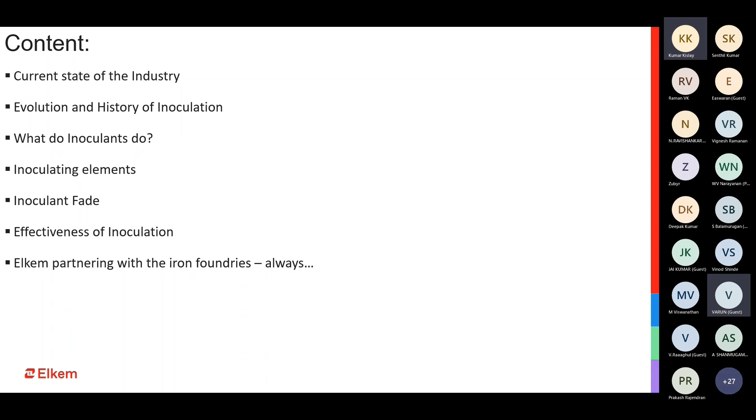To start with, we'll be talking about history and evolution, and I'm sure we have many senior foundrymen in the audience today who have seen the growth and development of the foundry industry over the last few years.

I would like to emphasize a few points. For example, we have seen casting buyers having much increased demand for mechanical properties like the strength of the casting, the elongation, the ductility especially for SG iron, the low temperature impact properties in such applications, the impact strength of the casting, surface finish, machinability, and the finish after machining.

We are also seeing unique grades coming into the market. Ten or fifteen years back we had a much more limited number of gray iron and ductile iron grades. But we have seen a lot of development in the last decade or so, with solution-strengthened ferritic grades, silicon moly grades, compacted graphite, CG, CMO, and many other grades with improved strength as well as improved ductility.

So that has come into the picture, which is a challenge for us as foundrymen, in terms of control of chemical composition, control of metal treatment, and control of the entire foundry process to try and achieve the properties desired by our customers.

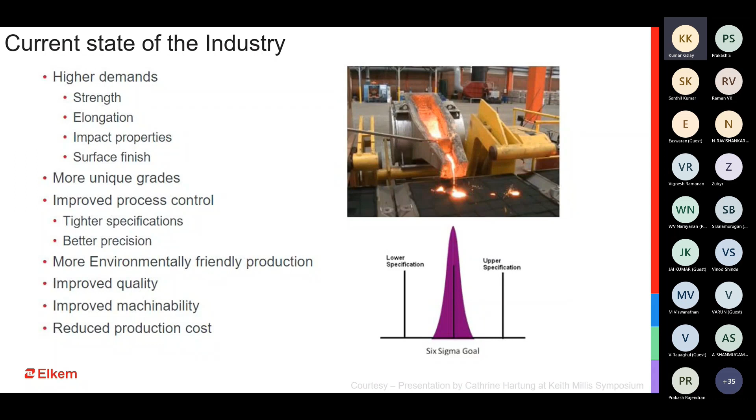So to start with, today the main topic is inoculation. We have been through COVID in the last 2.5 years, and we have all been vaccinated, I hope. Now is the time for the booster doses.

So what does inoculation actually mean? If you go by the literal meaning of the word inoculation, it is basically vaccination - an injection, a shot, an external foreign particle which gets introduced into your system, into the liquid metal, to improve the quality, properties, or entire behavior of the metal. That is what the inoculant does - a foreign particle introduced into the system.

So we can correlate it with whatever we want. It can be called a vaccine, a booster dose, or something which helps improve. It's quite similar to what we do when we get vaccinated - it helps our body become better or more effective towards external forces or deleterious factors. So that's what the inoculant does to a metal or a casting eventually.

So now a short trip down the history of inoculation. It's not new - in the early 1900s, that's about 110-120 years before today, casting was there, the metal was there, molds were there, and solidification was happening. It's not that if you don't have an inoculant, you don't get a casting - you still get them, but of course it will not be the same in terms of quality.

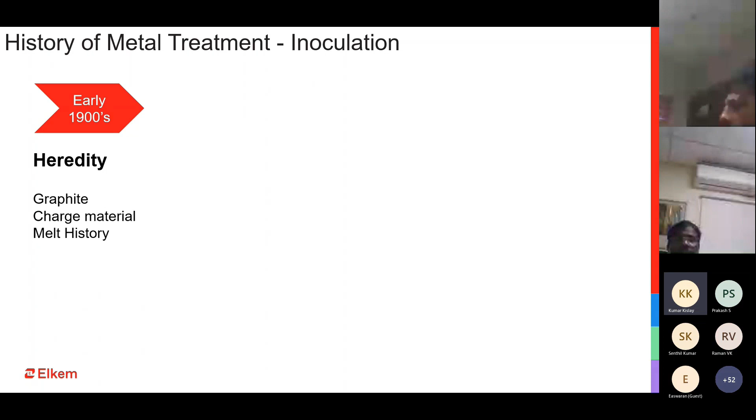So graphite, the charge material, use of pig iron, use of charged metals which are rich in nucleating potential, and of course the history of the melt - the heat, the temperature, the time, etc. That was the core essence of inoculation as a concept back in the 1900s.

Things changed a bit in the 1920s, probably coinciding with the First World War, when the industry wanted metal casting pieces to be more efficient, stronger, better in soundness. That is when deoxidation as a concept was brought into the cast iron industry, and the major elements used as deoxidizers were aluminum, titanium, zirconium, and vanadium.

These were the main elements, and some of them are still used today. It has been 100 years since we discovered the use of these elements for inoculation, and some of it is still there in the inoculating concept today.

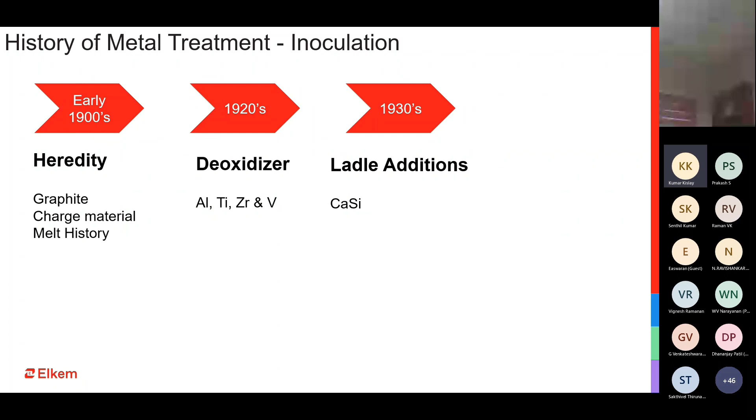About 10-15 years later, in the 1930s, we had calcium silicide as the additive into the ladle. The concept of adding something to the ladle as a post treatment, not in the furnace, was done for the first time around 1930s. The first material used as a ladle addition, with the aim to modify or improve the quality of the metal, was calcium silicide.

So after 1930s, once the concept of treating liquid metal with additives after the furnace came into the picture, there was a series of inventions which brought about many of the inoculating elements - some of it, in fact most of it, we see even today.

1940s was the beginning, especially in 1942 to be precise - we saw the first zirconium and manganese based inoculant come into the picture. I believe some of the members today in the audience have been using SMZ inoculant, a silicon manganese zirconium inoculant from Elkem, or maybe a similar composition from a different supplier. Zirconium manganese is a very common inoculant even today - that was the first proper silicon based inoculant, which had come into the picture in 1942.

Barium calcium came much later - contrary to the common understanding that it must be the first and most original inoculant. But no, it came around 1956. And 10 years later, we had the strontium inoculant, the Superseed or any other strontium inoculant that we have for gray iron today.

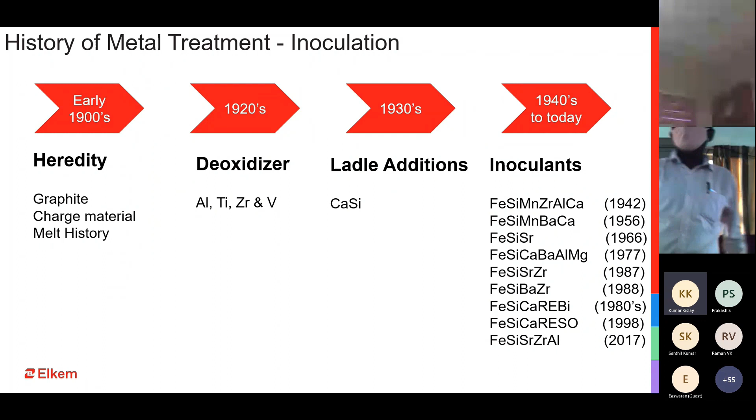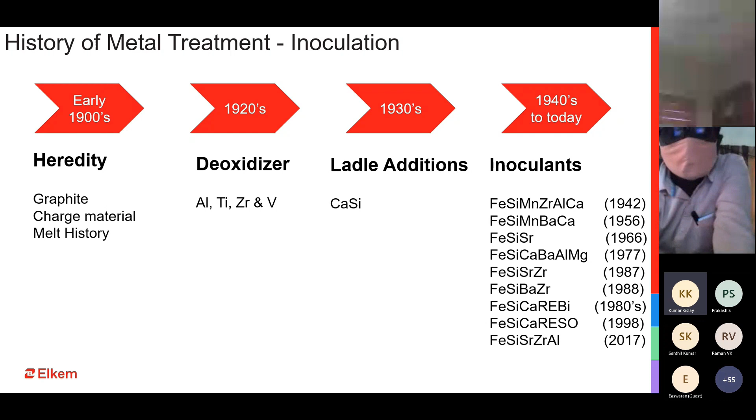There was a short period of time when magnesium was also introduced into the system as an inoculant. The role of magnesium was quite contrary to that of calcium barium. To give a brief history, when magnesium was introduced as an inoculant, it was not added to give a graphitization effect — it was actually added to control the graphitization effect. A team of scientists working in one foundry in Italy was working on controlling the microstructure, and that is where magnesium was introduced on purpose to see if it could control the growth of graphite, because magnesium is a carbide promoter. Magnesium negatively affects graphitization, so a small addition of magnesium was added to the inoculant to have better control on the graphite structure.

A combination of strontium and zirconium came in '87, a combination of barium and zirconium in '88, and then sometime in the 1980s itself, rare earths were introduced as inoculating elements. Rare earths with bismuth came much later, not for a long period of time. Bismuth could never gain the popularity as an inoculant, but yes, it did come into existence sometime in the 1980s, towards the end of the century.

1998-99 was the first origin of sulfur and oxygen coated inoculants. Until that time, inoculants were supposed to react with the sulfur and oxygen present in the base metal to give the inoculating effect. But then one of the scientists came up with the origin of sulfur and oxygen coated inoculants. Quite proud to say he was from Elkem — he was the person who invented this sulfur and oxygen coated rare earth based inoculant, which brought its own sulfur and its own oxygen into the system, thereby reducing the dependence on the nucleating potential of the base iron. This again became, and even today remains, one of the most potent inoculants for ductile iron.

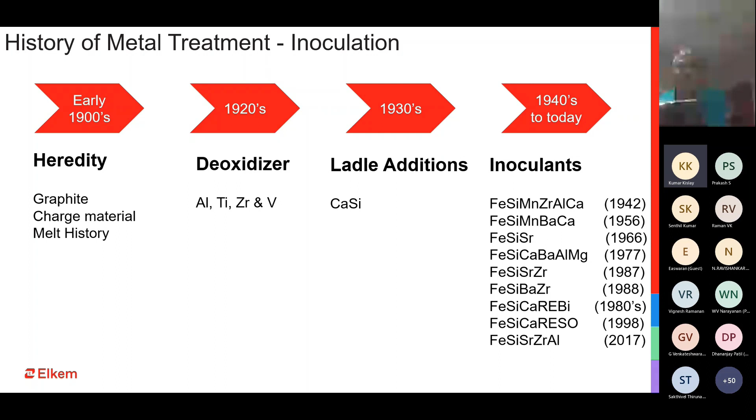Where we are today, I'll speak more about it in the later slides. But before I do that, let me give a short introduction on what an inoculant does. So what is an inoculant?

An inoculant is basically an external additive which is added to the metal, and the additions can be in the treatment ladle, the pouring ladle, or in the metal stream right into the mold — there can be different stages at which inoculant can be added. What does it do? It creates microparticles, small nucleating sites on which the graphite precipitates or growth happens. These microparticles can be sulfides, oxides, nitrides, even carbides in some cases, which act as a friendly site on which the growth would happen. So they act on the nucleation and growth of the graphite.

So what does the inoculant basically do? You have about 3.5% of carbon. About 2% of that carbon goes into solution as the solid solubility of carbon in iron, and the balance — 1.5% or 1.2%, whatever iron carbon is left — has to precipitate out as graphite. That is what we want as a foundry. If we do not make it precipitate as graphite, it would combine to form iron carbide. So what we want to do is introduce nucleating sites, favorable conditions where this carbon would precipitate out in the form of graphite.

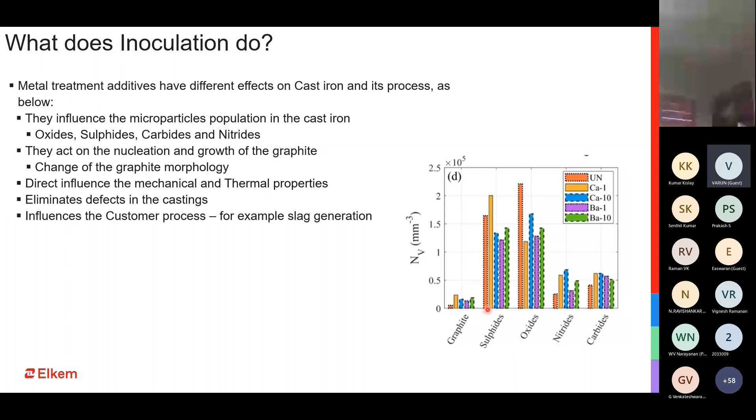How does it do that? How does the inoculant do all this? Basically, the inoculant is a ferrosilicon alloy with some additives. The additives are the inoculating elements, which I mentioned a few slides back, can be barium, calcium, strontium, zirconium, manganese, rare earths, bismuth, etc.

What do these elements do? The question can be, why only these elements and not the rest of the elements on the periodic table? These elements have a very strong affinity towards oxygen and sulfur. So they combine with the oxygen present in the system, they combine with the sulfur present in the system, and after combination, they create those inclusions, those small substrates on which the graphite would eventually precipitate.

Now, why is it only ferrosilicon based? That can be another question. Why can't we add pure strontium, pure barium, or pure calcium into the system? Why a silicon-based one? Why a ferrosilicon-based inoculant? This silicon which comes with your inoculant, which can be in the range of 50 to 75%,

this silicon coming in with your inoculant creates a small zone which is rich in silicon. I'm talking about very micro-level solidification here. There can be a very small particle, a very small site within your metal which will be very rich in silicon. Because it is rich in silicon, it gives constitutional undercooling, which allows carbon to precipitate out. It reduces the total percent of carbon that can be held by the iron, making sure the carbon which cannot be held back by the iron comes out or precipitates as graphite. So basically, this silicon reduces the solubility of carbon in your iron and makes sure the carbon comes out.

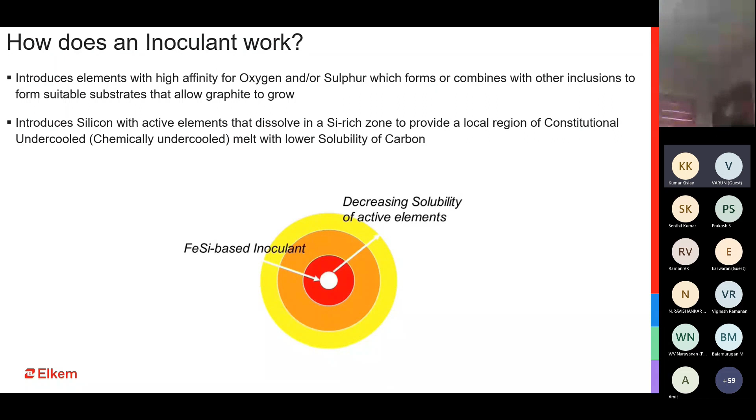So it's a combination of role between iron, silicon - basically Fe - and the inoculating element that we introduce along with this ferrosilicon as the carrier. So that is how the inoculant works. Each of these inoculating elements, like I'll speak about in the slides later, has a specific role to play, a specific characteristic, which would be the deciding factor for us as foundrymen on which inoculant to use for which particular casting and which particular condition.

So I told you about how the ferrosilicon and the inoculating element works. Like I mentioned, solidification would happen inside a casting, inside a mold. When you pour a liquid metal, solidification would happen even if we do not add inoculant. It's not that if you don't add an inoculant, solidification would not take place. Why? Because your metal will have some inherent nucleating potential, some inherent impurities which would act as the site for growth. So there will be solidification.

But then why to inoculate? Why do we want the inoculant to come into the picture? Why are we adding 0.1%, 0.2%, 0.3%, 0.4%, or whatever is the addition rate of inoculant into our metal? Very simply, it can be explained here. I would use the pointer.

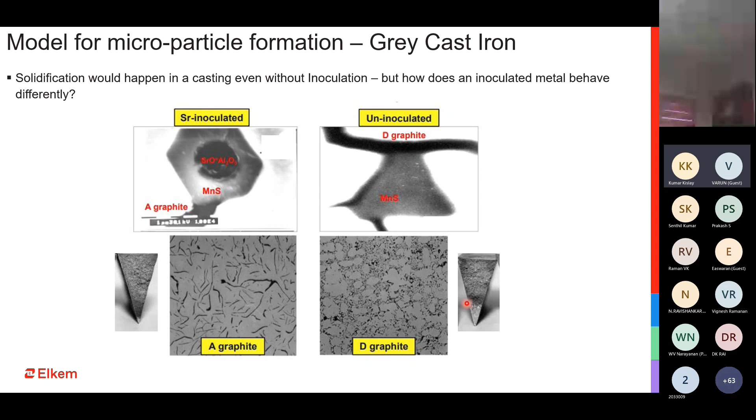Like I said, solidification would happen even without inoculation. But why does, or how does, an inoculant help? A good inoculant - and now I'm talking about ductile iron here, we spoke about gray iron before - in case of a ductile iron, a good inoculant will form a hexagon of oxides of inoculant and oxides of aluminum and silicon, which is present in your system. This will be around the core.

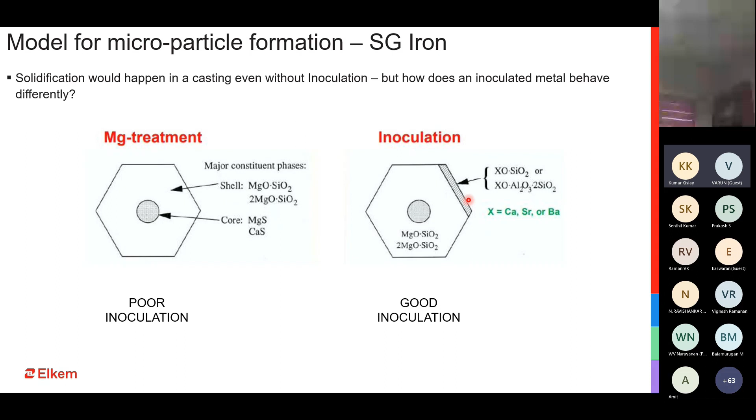Now the second question: why do you need it to be a hexagon? We are talking about magnesium. We have been speaking about the affinity of sulfur and oxygen, and how the inoculating elements, because of their affinity towards sulfur and oxygen, become an inoculant. So there should be a question: we all know magnesium also has a very strong affinity towards sulfur and oxygen. So why is it not an inoculant? Why do we not see magnesium acting as an inoculating element? And why do calcium, barium, strontium, etc. act as inoculating elements?

A basic explanation is that the silicates of magnesium are not hexagonal in shape. This is pure chemistry, taking you back to class 10th, 11th, 12th or so. Magnesium silicates are orthorhombic, while silicates of calcium, strontium, barium, and zirconium are hexagonal in shape.

So how does it affect graphitization? Graphite has a hexagonal crystal structure. So when graphite, which is a hexagon, combines with the silicates of calcium, strontium, barium, which are also hexagonal, it ensures that graphite can precipitate easily on this type of structure, but finds it very difficult to precipitate on an orthorhombic structure. That is why, despite having a strong affinity for sulfur and oxygen, magnesium is not an inoculating element, but calcium, strontium, and barium are.

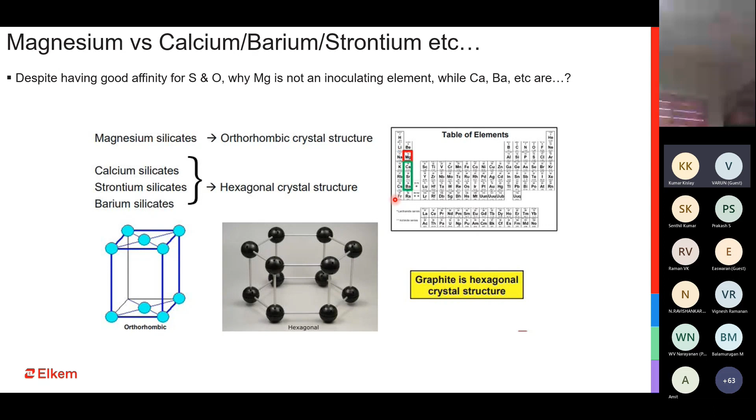How does the inoculant look? What is the inoculant? How does it look under the microscope? We only talk about graphite structures, the flakes and the nodules, but how does the inoculant actually appear? I showed you the schematics, but now we are seeing actual higher magnification images of the actual core and the actual graphite precipitating out.

So these are the microstructures, you can see it. This photograph was taken in 1993 by Torbjörn Skaland, and he still works for us. He's one of the Elkem stalwarts, if you want to call him. He was the guy who in 1993 tried to look under the transmission electron microscope and found the actual core of a graphite, the actual core of solidification.

And then we were also able to capture the different elements and how they look under the microscope, the different elements which promote or support graphitization in the casting. So this inoculation basically coats the microparticle, the core, which are naturally generated, reduces the undercooling, and thereby promotes nucleation or graphite precipitation.

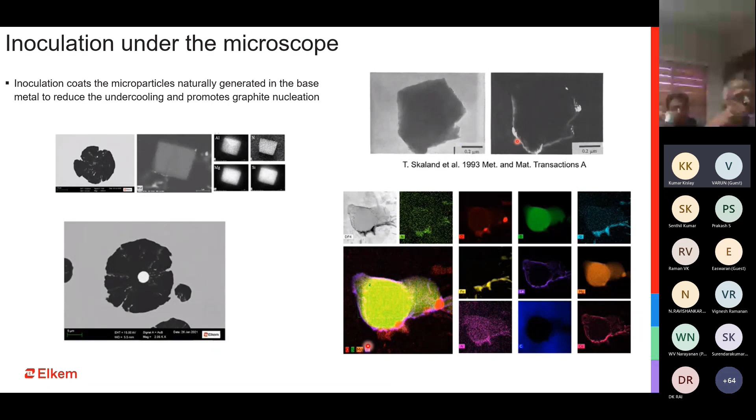I spoke about a few elements, maybe 2 or 3, but now we will look at the different elements and how to choose or select between inoculants. We have calcium inoculants, barium inoculants, strontium inoculants, aluminum inoculants, etc. Which to choose, when to choose, and why to choose.

Calcium is one of the most common and readily available inoculants in casting. Sometimes we get confused by considering ferrosilicon as the inoculant. Ferrosilicon is not an inoculant. It behaves as one only because it has some calcium in it. Any ferrosilicon bought from the market would have about 0.1 to 0.4-0.5% calcium, and this calcium is what makes ferrosilicon act as an inoculant. It is an essential element; most inoculants have calcium inherently in them, except maybe one or two.

It is a medium potent inoculant. It does not have very strong potency and has a much faster fading rate, so it fades pretty quickly. If you're using a calcium inoculant, you definitely have to add a lot more of it into the system.

Second is barium. In most cases it's used in combination with calcium. It's quite a universal inoculant, meaning it can be used for both gray iron and ductile iron, and also for compacted graphite iron. Barium has a much wider application range compared to some other inoculants, because the barium oxides formed have a much higher fading time, so a barium inoculant has very good fade resistance. For foundries with a longer pouring time or longer process time after addition of inoculant, barium is the way to go.

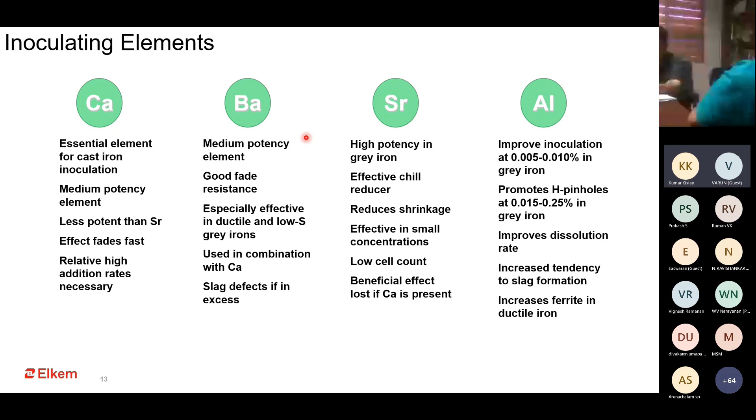There is a limitation to it. Strontium inoculant cannot work effectively if you have calcium present in the system, which is why most strontium producers do not add calcium to it. This is one of the main reasons strontium inoculants are not used in ductile irons, because ductile iron treated with ferrosilicon magnesium would have some calcium inherent in it. That's why strontium does not behave as it should in case of SG iron, so strontium inoculant is more commonly used for grey cast iron.

Aluminium inoculants are not very common on their own, but we do have aluminium present in almost all the inoculants available in the market. A small amount of aluminium improves graphitization - we saw the aluminium oxide forming the core in the slides before. It also improves the dissolution rate.

In fact, aluminium inoculant finds its maximum application in heavy section ferritic ductile iron castings because it has a very good tendency to promote ferrites. So most of the in-mold inoculation you'd see - the inserts and blocks added into heavy section castings, especially windmill castings - are in most cases aluminum-based inoculants.

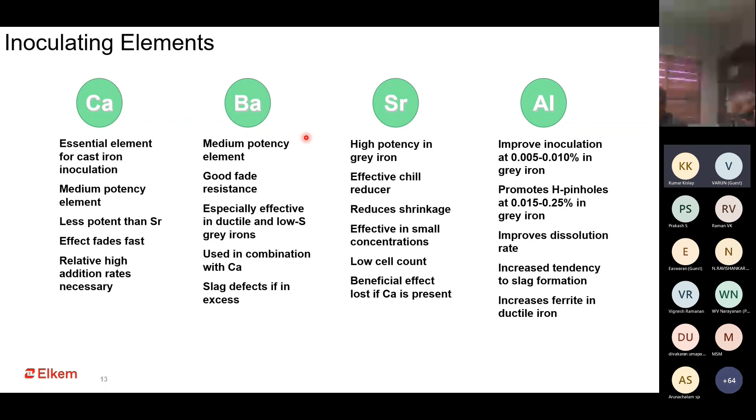The next one is zirconium. Zirconium-based inoculant, in combination with either strontium, barium, or calcium, and sometimes even independently, has a very balanced effect on casting solidification. It can find application in both gray and ductile iron castings. It refines the structure in a very good manner, especially for castings with heavy cores which can potentially have nitrogen fissure defects - zirconium inoculant finds use there because it controls the nitrogen fissure defect in castings.

In combination with strontium, zirconium inoculant also helps control the length of graphite flakes in case of gray iron, and also the coarsening of graphite flakes. So foundries having type C graphite problems, apart from controlling the carbon equivalent, can use a zirconium-strontium inoculant. Foundries producing gray iron castings with both heavy and thin sections may find a plain strontium inoculant not useful - there, a combination of zirconium and strontium gives a very good effect.

One of the latest or modern inoculants has been the rare earth based inoculants. Rare earth basically means primarily cerium and lanthanum. Rare earth element inoculants find application more into ductile iron castings. It helps improve the nodule count substantially in case of ductile iron, and has a very good tendency to control carbides and shrinkage in the casting.

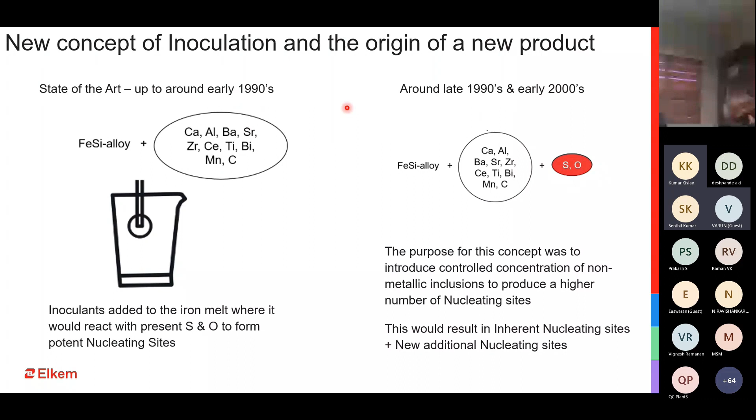So when ductile iron manufacturers do not add pig iron, they inherently reduce the nucleating potential, because even when pig iron was bringing the bad elements, it was also bringing in nucleation. The compromise was that we had to control the negative elements, and that is why we had to control the pig iron, but then we lost out on the nucleation. So how do you bring the nucleation back? One way is to precondition, but another way is to use an inoculant which brings its own nucleating potential, giving you additional nucleating sites along with the ones you already have. This was the concept because of which sulfur and oxygen coated inoculants came into the picture, and that was the origin of this flagship inoculant that we see in the market today.

Inoculation is the addition of a ferrosilicon based product, but we also add ferrosilicon in our system, more so to increase the silicon content. But that silicon which comes from your ferrosilicon addition stays in the system, whereas the effect of inoculation does not stay forever. So what do we call this phenomena? We call this phenomena fading.

The effect of any inoculant you add into the system is going to fade. It can have a different time, a different effectiveness, a different end effect, but the inoculant will always fade. The fading of inoculation starts right after the addition of the inoculant. There is a very small degree of fading which happens when you add the inoculant, but over time, the rate of fading increases substantially.

There are definitely a few inoculants, like I mentioned, barium, which fades a bit slower than the other inoculants. And why does this fading happen? We'll see in the next slide. But what happens when your inoculant fades? You have an increased undercooling, poor graphitization, and a much higher tendency for carbides. You have a reduction in the number of eutectic cells, much lesser uniformity in the flake distribution in your gray iron, and a much lower count of nodules in your ductile iron. Because you have a much lesser nodule count, your nodularity will also get affected.

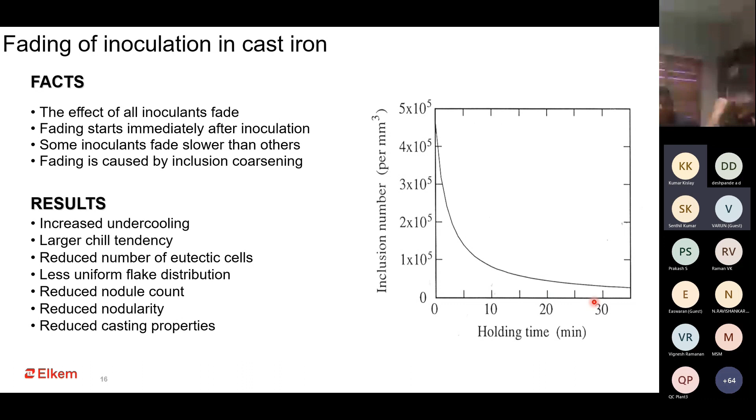Why does this happen? Why does the inoculant fade? When you add the inoculant, you actually create a lot of nucleating sites, a lot of locations on which the graphite would precipitate. But after time, these nucleating sites find it very difficult to hold on to their number, or hold on to their size and shape, because they are very micro in terms of size. So what do they do? They have an inherent tendency to try and combine with the next one. The two sites which are close to each other will try to combine to form a bigger site. And once it becomes bigger, it becomes more stable, more safe. And this tendency keeps happening with time.

This concept is called ripening. Ostwald was the scientist who found this, and based on his name, this effect is called the Ostwald ripening effect, where these small nucleating sites basically ripen. They become bigger, and eventually, as they keep becoming bigger, the number of nucleating sites keeps coming down. And as the nucleating sites keep coming down, the inoculant effect keeps coming down, and that is what we call fading of inoculant.

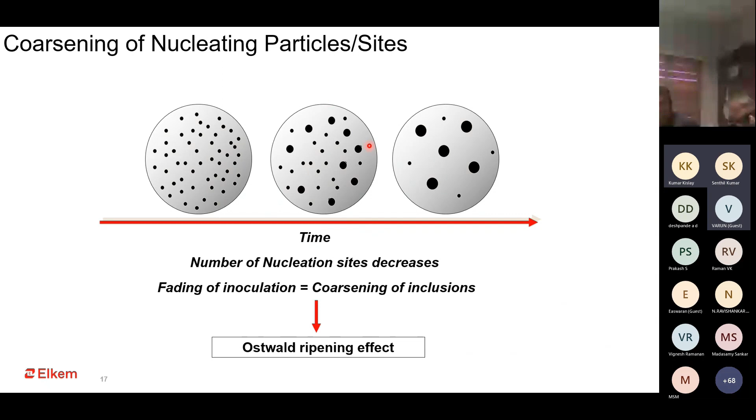What do we want to do? We want to make sure that our complete solidification and complete casting happen sometime here. Not the solidification, but at least the casting should happen somewhere around this time, so that you have sufficient amount of nucleating sites for the graphite precipitation.

But then how do you analyze if your inoculant is good? How do you analyze if your inoculant is working properly? You can look at the chemical composition. Yes and no. I mean, just having the silicon increment, you will not have an increase of any other element basically. Maybe about 60% of your inoculant addition will be silicon, so we'll have some increase in your silicon. But just having an increment in silicon does not assure or ensure that your inoculant is working. That is basically ensuring that your inoculant has been added.

A better way of doing it is to look at the microstructure. When you look at the microstructure, you'll have a much better graphite precipitation, a much better carbide control, and a much better uniformity in your structure. Even more potent and accurate is to look at the thermal parameters. You look at the thermal analysis, the lower eutectic temperatures, the solidus temperature, the graphite precipitation behavior, and the angle towards the end of solidification to see if you have enough graphite precipitation.

You look at the recalescence. These parameters give you a very direct indication on the effect of nucleation. Further, if you're able to achieve a good microstructure, a good thermal parameter, definitely the mechanical properties are the next things which will give you an indication that your metal has been properly inoculated.

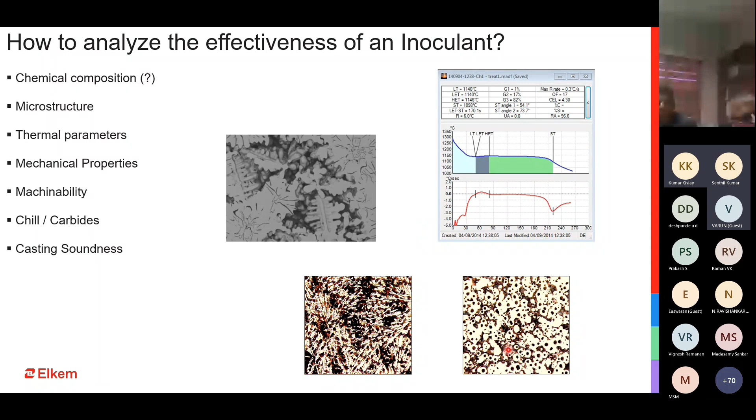So you ensure enough graphite, you ensure that you do not have this directional solidification, you ensure that you have enough graphite precipitation, which would compensate for the volumetric shrinkage, and thereby you get much better casting soundness and do not end up with something like this. Or something like this, where you see these carbides and where you see this not so good nodularity.

But does a good inoculation ensure that you get a very good casting? Or does it alone ensure that? Definitely it helps, but it is not just the metal treatment or the inoculant. This is more of a disclaimer from the inoculant manufacturer, that it is not just the inoculant which ensures that you get a very good casting.

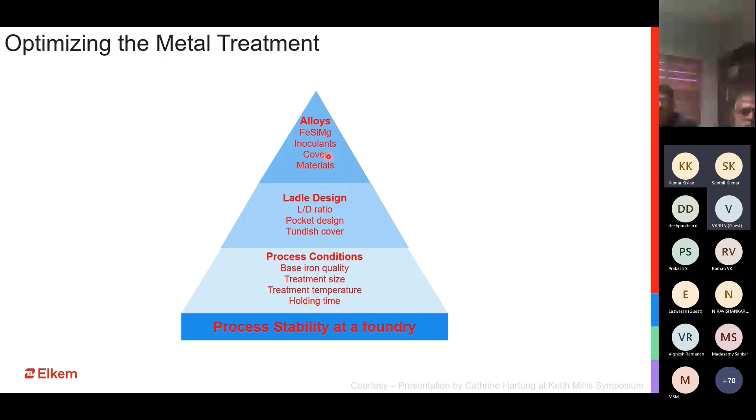It's more towards the process stability. It's more towards the process conditions like the base iron, the treatment size, the treatment temperatures, the holding time, the design of the ladle, and eventually the treatment alloys that make sure you get much better process stability, you get a much better casting.

And what do we have to do? We have to always make sure that we work from the bottom to the top. So unless we are taking care of these parameters, unless we are looking at these conditions, just relying upon and depending upon the treatment to take care of the issues that we have in the system will not always give you the best results possible. So we have to work in this direction. We have to make sure that the rest of the system is good, and then definitely inoculant is a friend which would help us produce good quality castings.

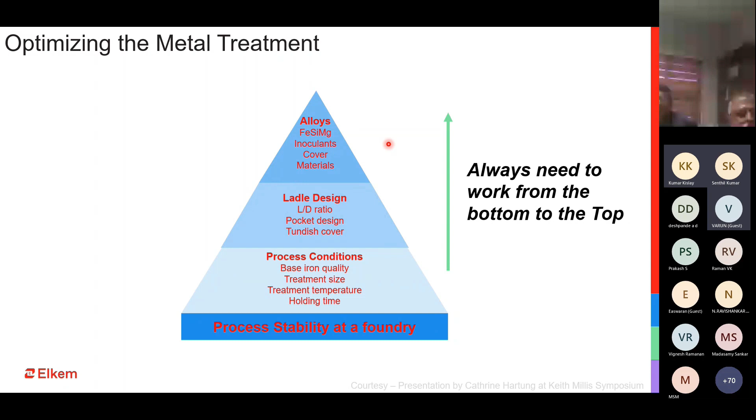Now I'll talk a bit about some of the new products, some of the new concepts, and how they help us get the best of our inoculation, and also help us improve and eventually achieve the best quality castings.

Preconditioners. We spoke about the furnace, the inherent base nucleating potential, the quality of the base iron, and we also spoke about the limitations and dynamics of raw materials that are there today, including the cost and impact of it.

So in some cases, we end up having a not-so-good base metal. It could be because of the raw materials, the process, the limitations a foundry has, or the heavy critical requirement of the casting. When the casting needs something extraordinary, the inoculant alone may not give you the desired effect.

In all these cases, we tend to introduce a preconditioner. A preconditioner is basically a furnace additive added in the range of maybe 0.1 or 0.2%. What does it do? It ensures that it improves the quality of the base iron, makes it consistent, improves the morphology of graphite, negates the impact of tramp elements or trace elements, reduces the tendency for carbides and shrinkage, improves mechanical properties, and reduces the need for pig iron.

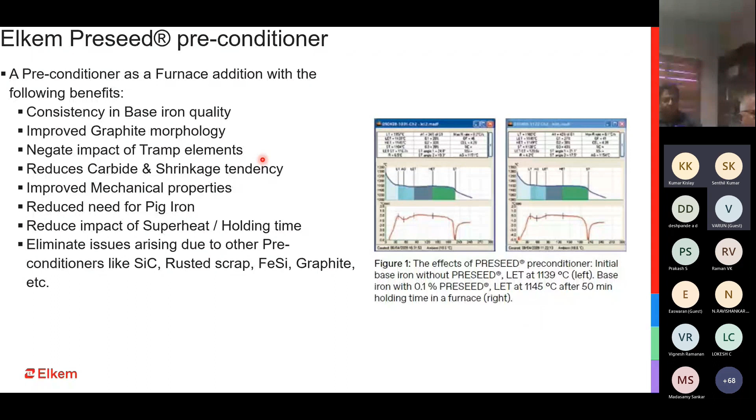That means we are not sure how effective it would be. There will also be a limitation on the graphite that you are adding. So all these negative elements or aspects can be controlled when you have a preconditioner, more like a Preseed.

Another way of doing it—I'm talking about additions to the inoculation—is by having a very good treatment cover. When producing ductile iron, we all know that we have punching scraps, or sometimes even turning borings or other such things which we add as a cover. The role of the cover in these cases is to delay the magnesium reaction.

What do we want to achieve? We want the magnesium reaction to happen when you have sufficient amount of metal in your ladle, so that you get better recovery of magnesium. But that is not always possible with the covering scraps, or with the turning and borings.

Why? Because these covering scraps and turning borings need a lot of heat for melting, and they may bring their own set of unknown elements into the system. It can be oil, rust, lead if the scrap is coated or painted, or zinc. There can be many more things which these covering scraps can bring with them. When you have such a covering scrap, your inoculation and even your ferrosilicon magnesium treatment will not be effective.

So what do you do in that case? You add a known cover, one for which you always know the chemical composition, and you add less of it. How does it help you? It improves the recovery of magnesium.

It conditions the slag, making sure you have dry slag so it does not go into the system, into the molds. It increases the nucleating potential, and definitely improves the stability of the process compared to unknown covering. It also reduces the power cost and the cycle time—though we can take that up as a separate discussion.

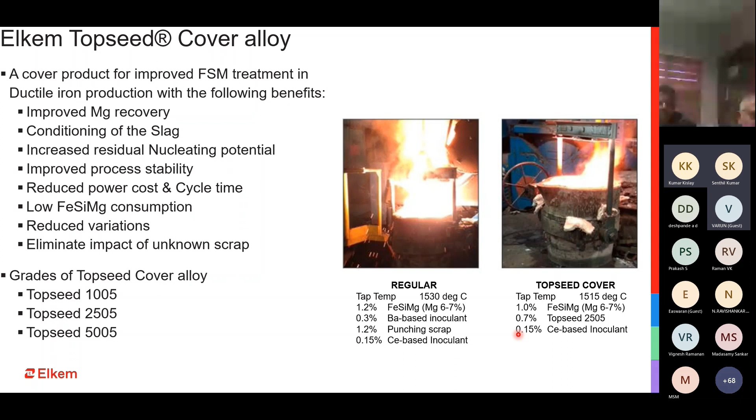It reduces the addition rate of ferrosilicon magnesium. It reduces the basicity variation in the system. And as I mentioned, it eliminates the impact of unknown scrap. There are case studies where we have seen the use of Topseed reducing the addition rate of ferrosilicon magnesium, reducing the requirement of inoculants, and also reducing the tapping temperature and time. So basically the cycle time and power cost.

And finally, the ultraseed family, that is the sulfur and oxygen coated inoculants. A ferrosilicon based inoculant does have active elements. But when these active elements are coated with sulfur and oxygen, it allows them to form its own inherent inclusions, which give you much better graphitization and better control on the carbides and microporosity. This type of inoculant is more suitable for both thin and thick section ductile iron casting, and finds its application more into ductile iron casting compared to gray iron casting.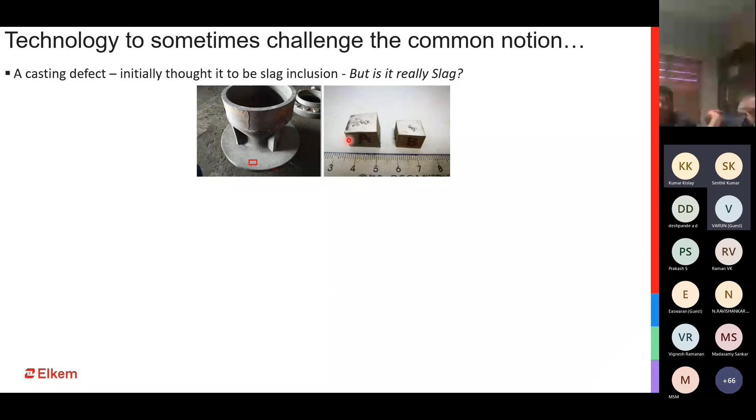So when we looked into the casting using the SEM and the EDS that we have with us, we identified some silicon carbide inclusion. We identified some slag inclusion. So yes, the foundry was not completely wrong. They did have some slag, but it was not just slag. We identified some aluminum oxides, zirconium oxides, and silicon carbide inclusion.

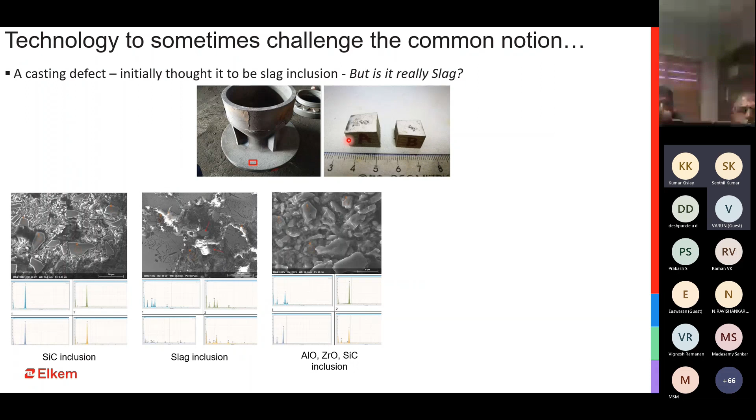Where would this come from? Probably from a broken filter. That's possible. And the broken filter itself might have caused slag inclusion because it was not able to trap the slag in the root. And then, interestingly, we also found some resin, coal, and coke inclusion inside the casting. So it was a combination of these four different inclusions which was giving them the casting defect.

So do you think with this kind of a setup, just having control on slag would have resolved the problem? No. So this is just to reinstate the fact that when we use technology, when we don't go just by the traditional or original ways of looking into a defect, we will be able to do a much better root cause analysis and eventually get a much better solution to the problem.